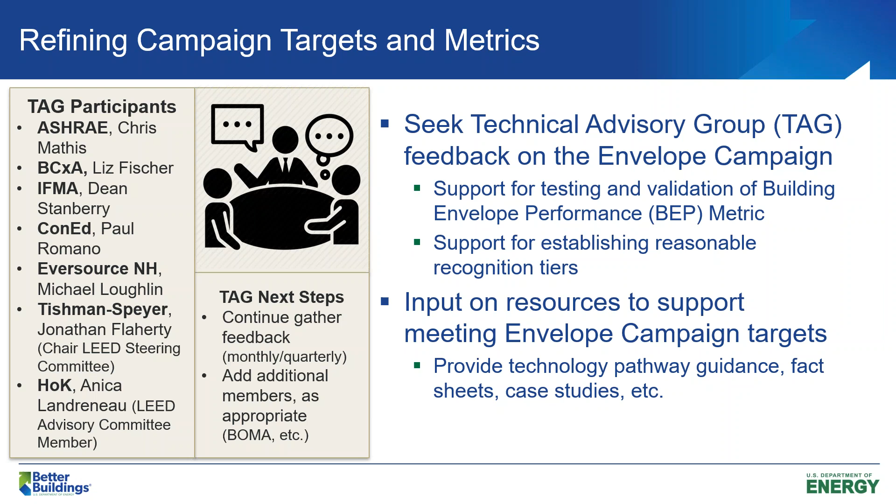Real quickly, these are potential recognition tiers and categories. These may be adjusted if we feel that we've set unrealistic goals, but we will have one set of recognitions available to existing buildings that are retrofitting their building envelope. So this would be a Retro 30 and Retro 50, which would be the building envelope heat loss gain reduction of either 30 or 50%.

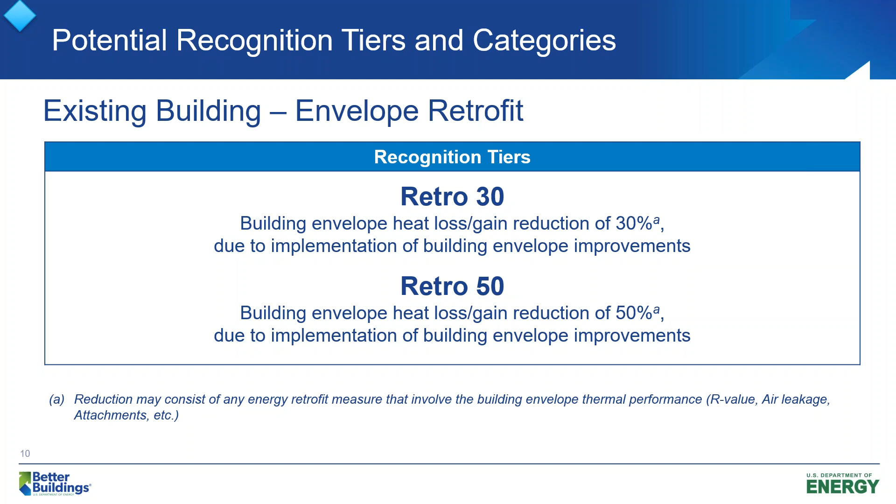Due specifically to the building envelope improvements. We are also going to have a new construction tier. So this will be Novel 20 and 40, and this will represent that same building envelope heat loss gain reduction of either 20 or 40%, but that will be a comparison between the newly constructed building and code. So what improvements were made over the code requirements for that building.

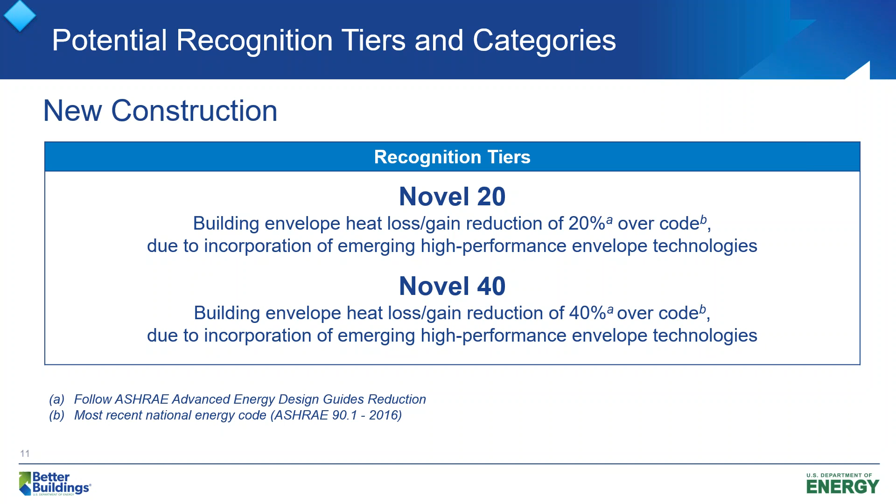And then our last recognition categories will be role models and honorable mentions. So role models will be for buildings that have already hit a previously defined recognition tier, but have really gone above and beyond and have incorporated an additional advanced strategy or technology. And we want to acknowledge those buildings as really being role models in the industry.

And then honorable mentions for buildings which do not necessarily meet a campaign recognition tier, but still make a noteworthy impact on the campaign. So if you have a 5 million square foot building that only hits 29%, we might consider giving you an honorable mention because we do appreciate all the participation in this campaign.

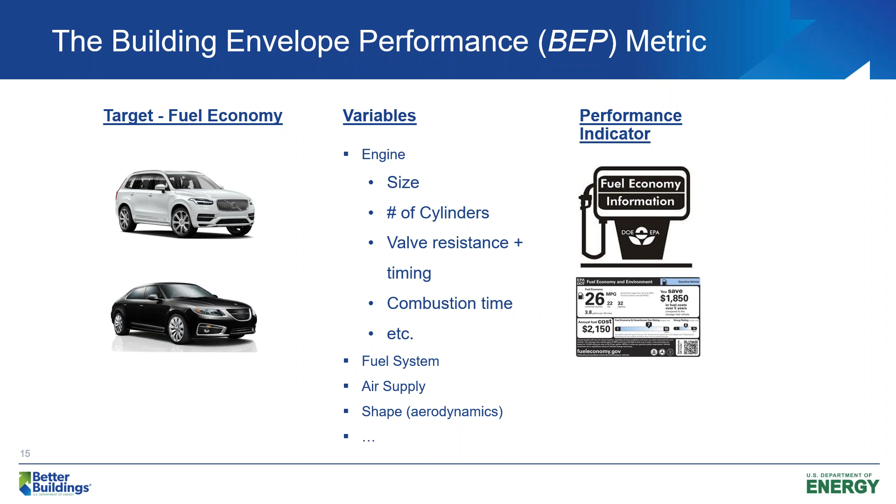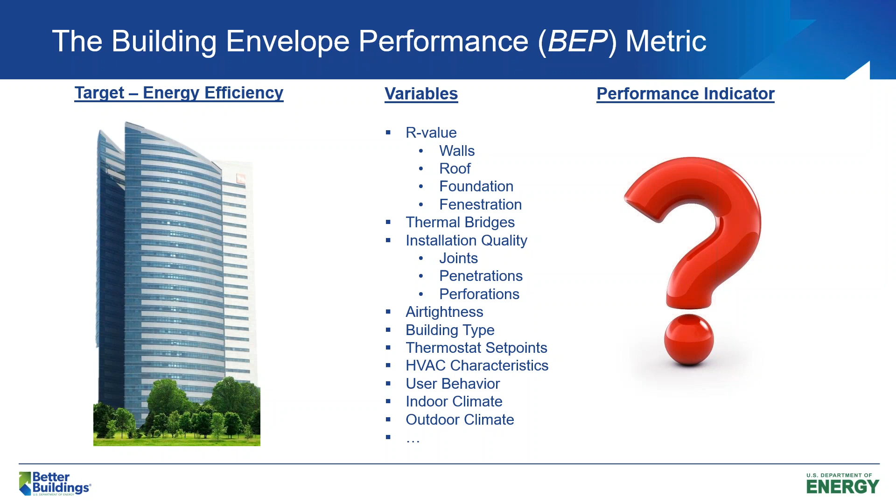If you look at buildings and what we deal with, we have also tons of variables that will impact the performance, but we don't necessarily have a performance indicator to go with, right? But we do have EUI as one, and it gives us an indication. But the thing with EUI is that, unless we talk about predicted EUI, it's only applicable to existing buildings, right? And I say here it's a one-way connection, and what I mean with that is that it's really a black box. You don't necessarily know what's inside it. You just know what's sort of coming out of it.

So if you're looking at retrofitting a building, or want to understand where you can potentially see energy savings, if you can't specify each variable here, or at least put them together in a way that will mimic the performance, you really don't know what your payback will be. The EUI is highly influenced by building usage, so whatever takes place inside the building very much influences the EUI. That's a downside of this, and obviously your conditioning system, heating, cooling, and the characteristics of the system are part of the EUI too.

And then we have the predicted, right? The downside could be that you make a lot of assumptions on things, and it could be complicated and time consuming as well.

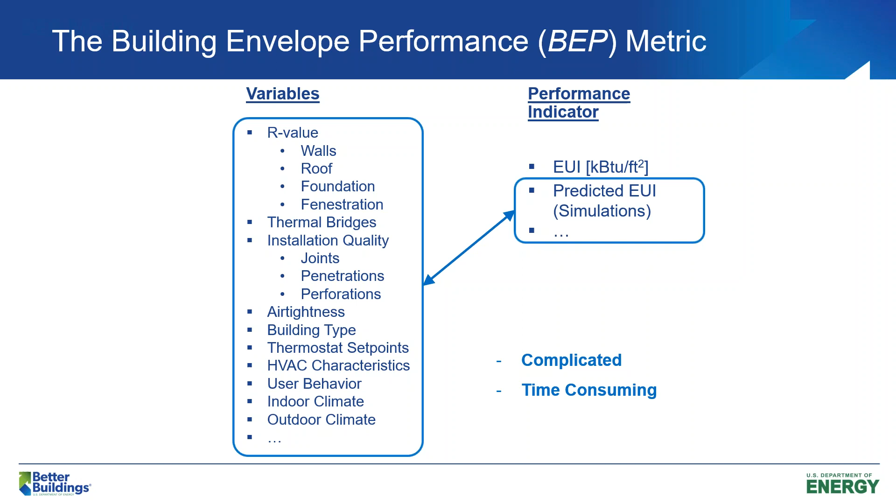So regardless if you look at the predicted or the actual EUI, we can't really look at just the envelope performance, or understand what the thermal performance of the envelope will be. In that way, EUI is not equivalent to miles per gallon, because miles per gallon is decided on a sort of driving pattern, but the EUI is highly influenced by the driver, if one would try to make that comparison.

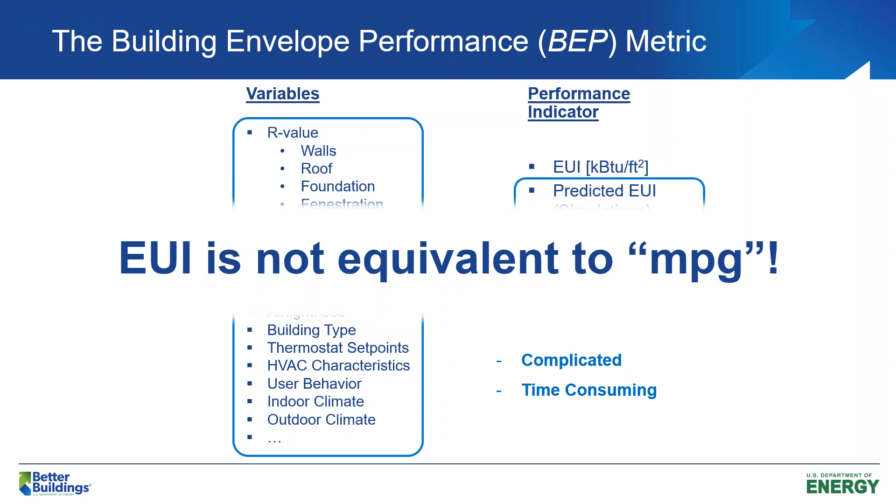Well, enough talking about miles per gallon. So you can look at it this way - now here comes the equations. Don't be afraid if you don't like equations, this is pretty simple here.

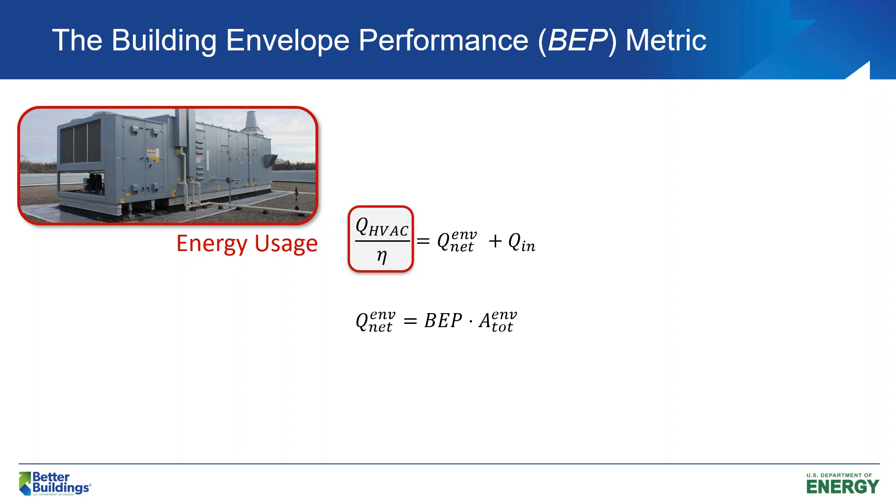On one side we see the energy usage, which is the energy demand and the efficiency of the system. This will be equal to, roughly in general, whatever heat transfer goes on between the indoor and outdoor environment, plus whatever heat internal generation you see inside the building. So that's a generalized expression, but it's pretty valid.

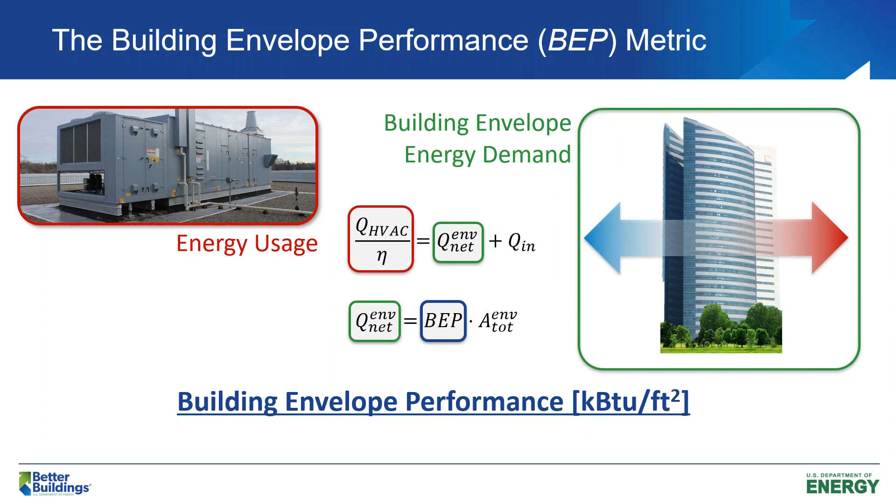And what we want to lift out and emphasize in this campaign is what we see here in green, as the building envelope energy performance, and the demand it will have on the HVAC system. We use that by defining a new metric, which we refer to as the building envelope performance metric, the BEP. And what the BEP actually uses is sort of effective cooling and heating degree hours, not just traditional cooling and heating degree hours, but the effective one.

I don't have to go into detail really what it does, but I can give you an example. Let's imagine you have a building somewhere with a lot of windows, and it may be 65 degrees outside, but because of solar loads, you still have to cool this building. Ignore the internal loads for now. So what this effective cooling and heating degree hours is looking at is when you actually need to cool and heat, not just what traditional heating and cooling degree hours is - just comparing indoor and outdoor temperatures and seeing when it's either above or below.

And then you divide that over what we defined here as the overall building thermal resistance. This is the meat of the equation, the really important part of the definition. The R is not an R value, but it's an overall thermal resistance, and we could give it any Latin alphabetic name, but it's the overall thermal resistance.

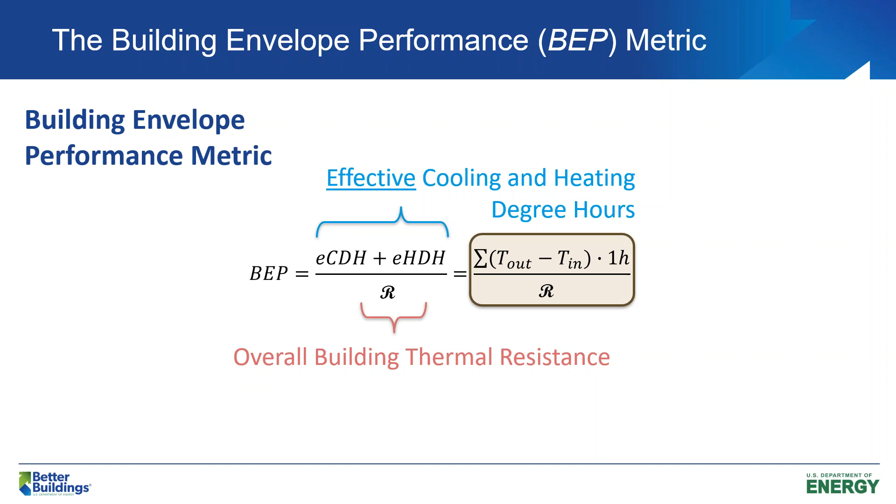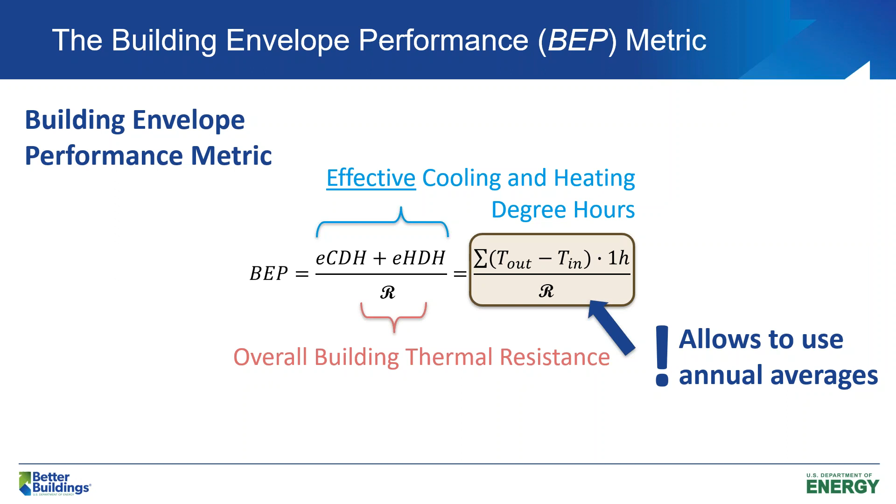What this allows us to do is use annual averages, the way we defined it here and the way we're going to use it in the campaign. But remember, the BEP represents the thermal performance, so the energy demand per envelope area - that's the unit of this metric. The energy demand, if we hold on the HVAC system, per envelope area. And it all comes down to this overall thermal resistance, which is the most complicated slide here with the equations, so it's not going to get any worse than this.

So here you see up at the left corner that we have three variable terms that have an R. One is one you're used to, called R envelope, which is when we talk about R values like R13, R19 - this is related to that. That has to do with conductive thermal heat transfer, related to that part of the building. But we also have one called R air, and that's how we define the air leakage you see in your building as a thermal resistance.

And we have a way of doing that. And then you have one that is called R gain, which represents the gains you see through, for example, windows - the solar loads. The solar radiation goes through the window, the part that is not reflected, and that acts more like an internal heat source immediately.

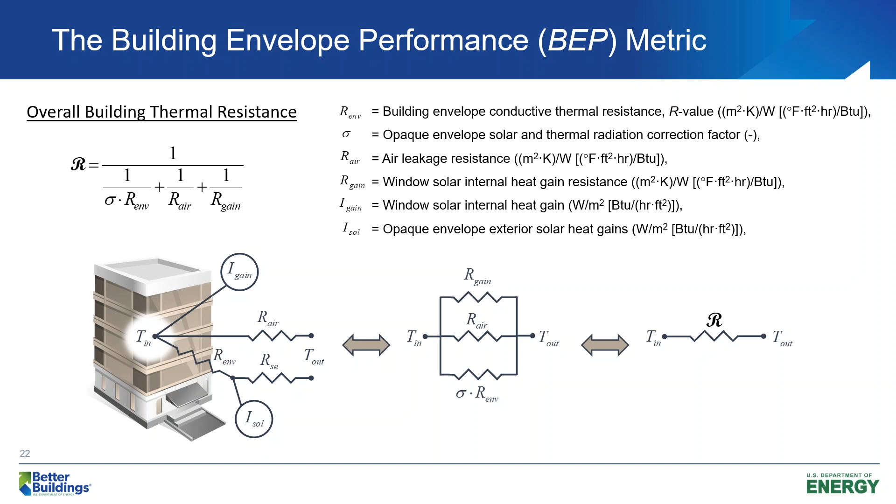So that's the three main terms of this overall thermal resistance. This is just showing you quickly when we validate it. We are still validating this metric and the applicability, but this is just sort of trying to give you a sense of what it represents.

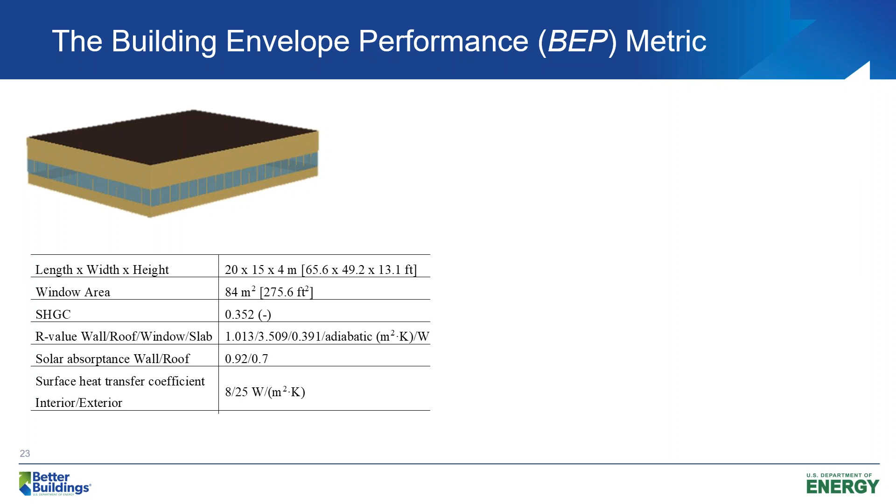This is a very simple building that was created with, I think, window to wall ratio of 30%. I think we have 30% windows here. And we put this in different climates and looked at what the variation would be. I'm not going to go into detail here more than saying that we compared it with other more sophisticated simulation tools, and we see a very good agreement with these tools.

Again, why do we want to propose a more simplified method? Well, if we can, it would be convenient in many ways. It will help us to quickly assess the performance of the building, and when we implement this into a tool that we can use to assess performance, it's something that can go pretty quickly, and you can get an appreciation of the performance very quickly. There are many benefits from having a simplified approach.

Now, this is how the metric is defined, and right now I totally understand that you have no appreciation of what a BEP metric of 20 means. And to be honest, neither do we, because we just started working with this, and with time here, we're going to understand what a good BEP value is.

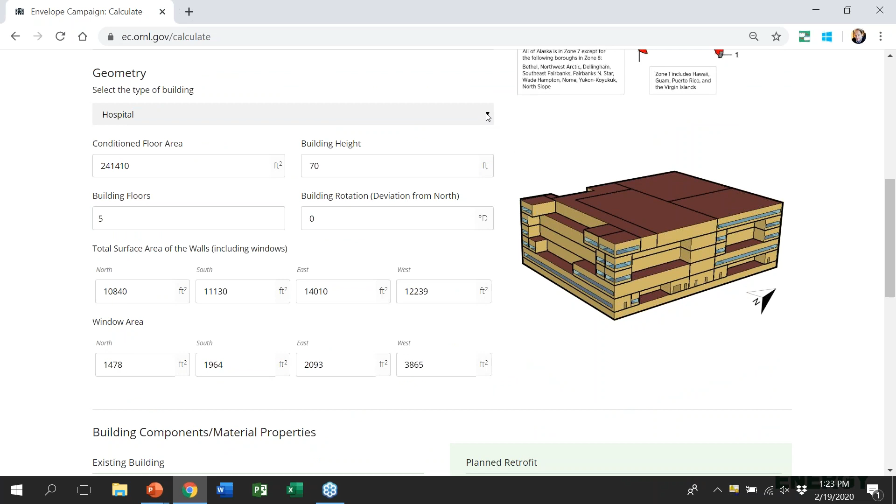Then I have to make a selection of how exposed it actually is to the outdoor environment, especially wind. I'm just going to click on suburban here, and then go down and click on what type of building I have. And then we have 14 DOE prototype buildings to choose from.

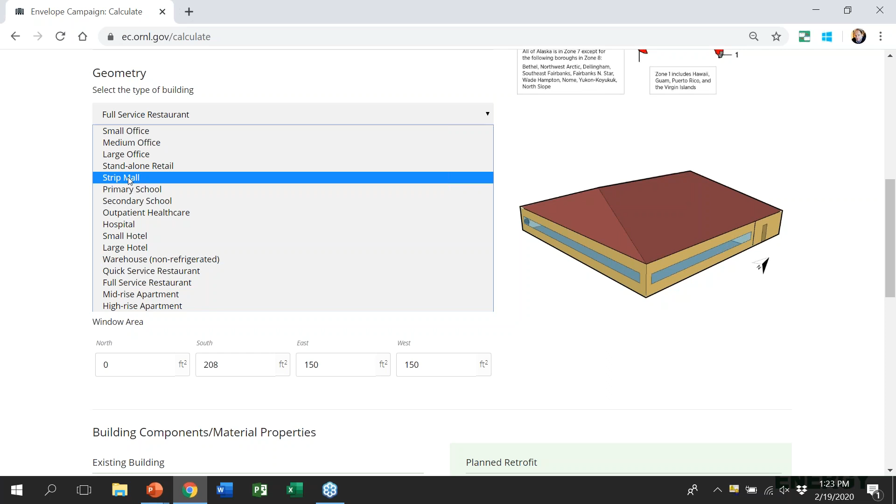And they are all in here. We have talked about potentially adding a way of defining your own geometry, but for now we have these prototype buildings. And like Haley mentioned, we would love to hear any feedback you have.

For example, I can't find a building that would work for me. We need to do it in a different way.

Okay, so let's assume that I pick a medium office here. Then the geometry will be prepopulated based on what type of building I chose, but I can also make changes here. So if it doesn't match with what I have, then I just change the surface areas or the number of building floors or the building height or the conditioned floor area.

I can even rotate the building so that it represents my building and the exposure I have, which is mainly important for the solar radiation, solar loads.

Now, if I scroll down here, when I made my selection, it also started to populate based on, I said that this building was built in 1988. So then it pulls the code from that time, and you'll see that inside these boxes.

Again, I can make the change. I can change these and say, no, that's not what I have. I have this, and put that information in here of my existing building. And so all these values can be changed, and I can choose whatever material I have for the surface. The surface is important just because we need to know because of the solar reflection.

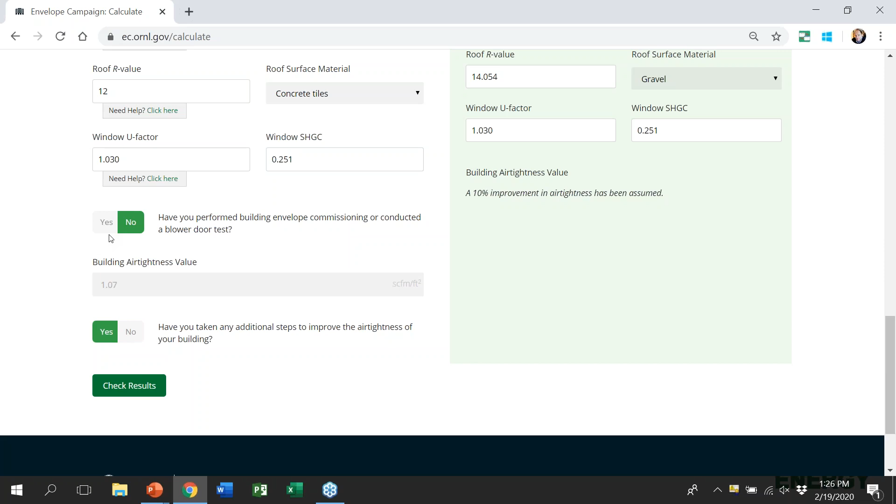But let's say I have performed a building envelope commissioning or conducted a blower door test, so I actually know the air tightness of my building before. I can put that in here.

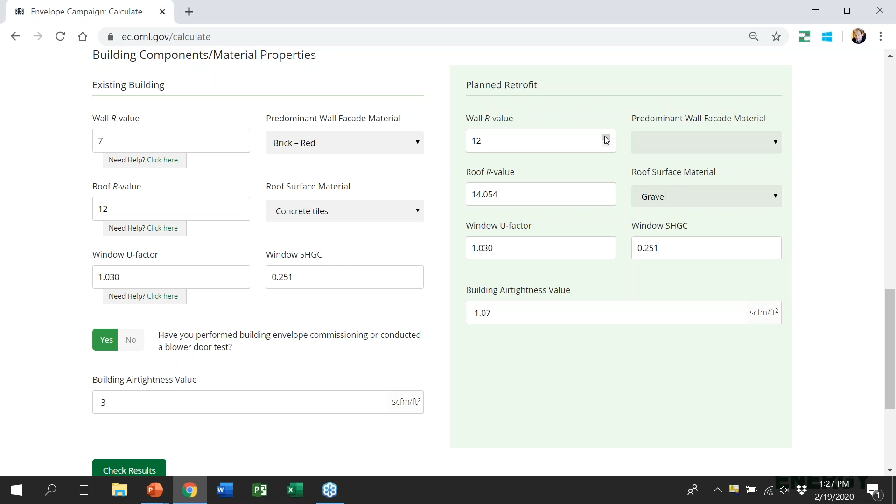Now, this is the existing building. Now I need to move over to my planned retrofit or my recently retrofitted building, and I can change the values. So if we compare between the sides here, maybe I did something, I replaced the cladding, or I did something to improve the R value of the walls, then I could do that here.

And I want to see, okay, what improved performance is expected from this. I can click on check result, and in real time, it will tell me what the improved performance looked like. So here it says that based on what I defined, I improved the thermal performance by 20%.

I am so sorry for that.

Okay, so here we can compare between the before and after, and I can see what changes I made and what the impact was on the performance.

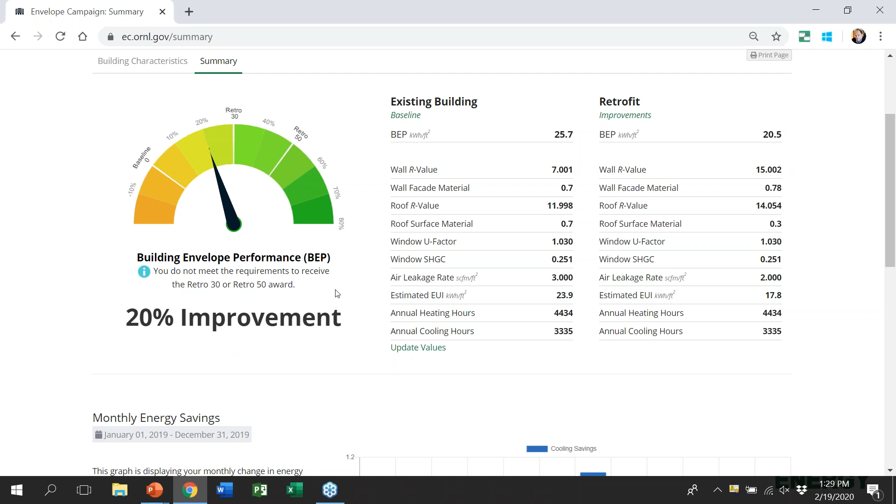Did it get us to Retro 30? Right? No. So it says you do not meet the requirement to reach Retro 30. So you could go back and see if you want to improve something else, if you have that bandwidth to improve here.

Some of the things also here, you may put some more in terms of air tightness. Instead of 2, you could do maybe 1.5. I don't know what those numbers are exactly. And then come back and see how good you did. Yeah, it's almost there, but not yet, 26.

So this tool can also help you play with how your improvement can be done. And from 1.5, let's say we went to 1.2, it should be able to bring us to that level, exactly 30%.

So yeah, here you go. So based on this kind of improvement, you can achieve your Retro 30 certification here.

Is there anything you needed? Okay, I've made note.

The idea of this tool is for the user to check whether they meet the criterion or criteria for retrofit buildings or new constructions, and easily look at 'what if I did this?' What if I improved my R value? What if I changed the surface material? What if I improved the air tightness? What if I replaced the windows? Anything here, and quickly see what the change would be in performance.

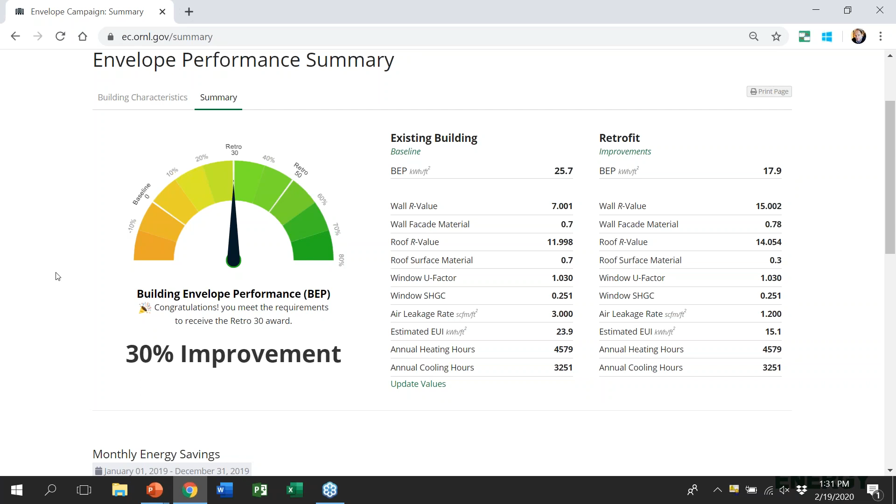We do have some extra features here that will be available as well, where you can look at the monthly energy savings, separated by cooling and heating.

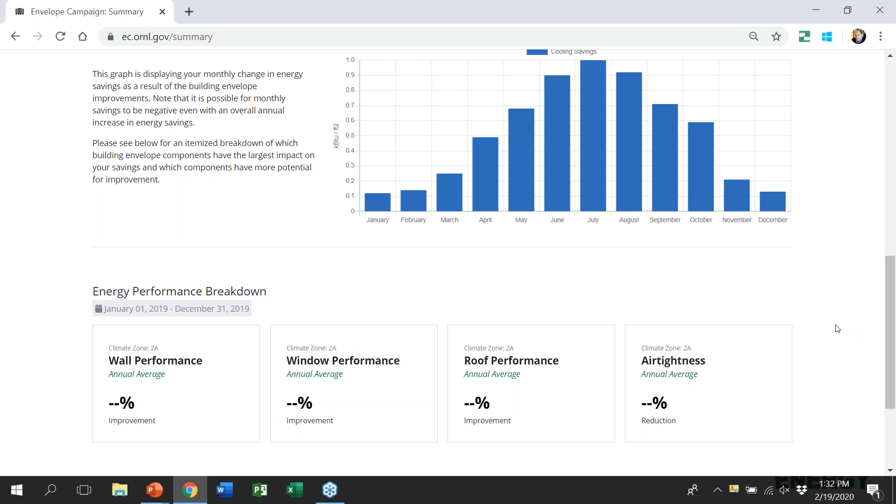We will also have a really cool feature available shortly, where you can look into one of these four categories and see what the relation is, if you improve the R value, versus what your savings would be. It will show you a graph or chart of the relation between an increase and the expected improvement, giving you a nice overview of potential areas to focus on.

I think that's it on the tool.

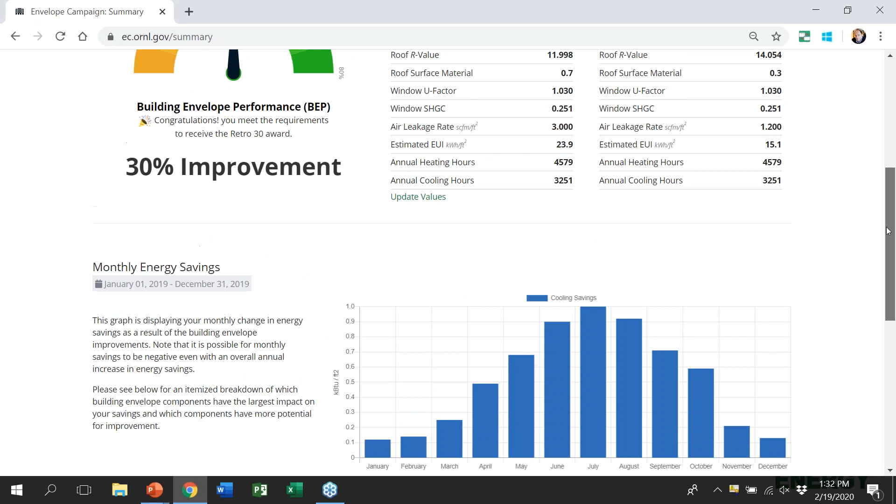Haley will tell you all about how you can get access to this tool and start looking at it, if you have any buildings you can try out to see if you could potentially be eligible for an award here with an existing or recently finished project. But I'm going to hand over to Haley here. Thank you.

Hello everyone, Haley again. One more thing I wanted to talk about while we're still on the website: once these are up and running, what we are planning to do is have nice links embedded here directly to our resources.

So once you get this breakdown, if you see that everything in your building is excellent except for your windows, we would like to immediately link you to resources for improving or replacing your windows. Hopefully this will funnel you directly to the resources that you need.

For now, the resources are available after you log in, broken down by an FAQ about the entire campaign process, which is also linked in our footer. We have in-house webinars, which will get added to that list shortly. We have a list of other calculators published by industry or other national labs that may focus more specifically on wall assemblies or windows, to help you get more information on how you want your new building or retrofit to go.

Okay, now we are off of the website, and I wanted to take a moment—we've been talking about the nuts and bolts of the campaign, but I want to take a step back and talk about the larger campaign process.

The first thing that will happen is you will register with us and let us know that you are interested in being a member of the campaign. At that time, we will send you login information so you can log in and start developing that BEP metric for your particular building or buildings.

You will use this tool to determine what those values are, and we will provide technical support as needed. There will be lots of resources published on the website, but if you need additional feedback or don't understand a value the tool is giving you, we will be here for all of that technical support.

When you've developed the metric for your building, planned your retrofit, or completed a new construction building with great improvements over code, you're going to send those results to us for validation. At that point we will review those results and, in most cases, request some verification documentation.

That may just be additional information from your commissioning agent or a cut sheet for your window—things like this. It shouldn't be anything majorly complicated, just to confirm the values you've entered into the metric. After you provide that to us, we'll look it over.